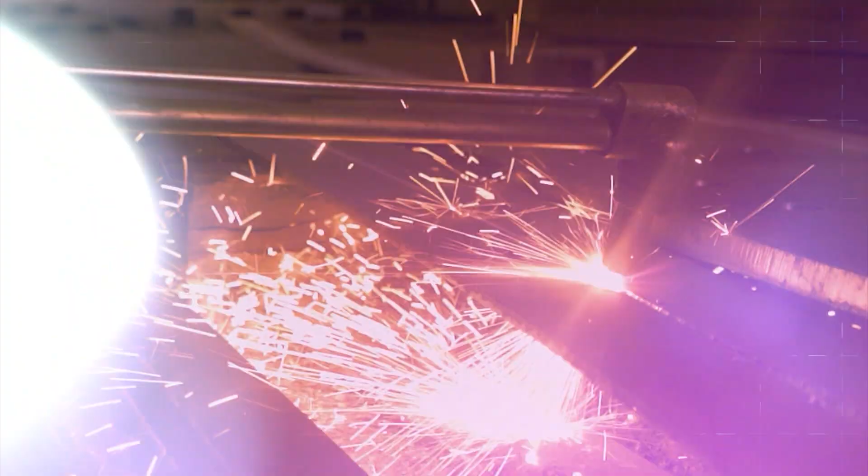Approximately 10,000 metric tons of steel, over 42,000 cubic meters of concrete, 2,300 construction professionals, 20 hours a day for 15 months, over 2 million safe person hours. Building this architectural marvel was truly a challenge.

Hockey Stadium, Rourkela, up and running. The stadium is one of the best that I've ever seen. Oh, it's one of the best stadiums I have ever played in. This is the making of the Birsa Munda Hockey Stadium in Rourkela.

Situated in the Sundargarh district of Odisha, the cradle of Indian hockey, Rourkela is an industrial town. We are celebrating 75 years of independence. It's a landmark, milestone for a democracy like India to link this World Cup with the independence movement. And Sundargarh is a tribal district where the great legend Birsa Munda had his footprints. So Honorable CM decided to name it after Birsa Munda.

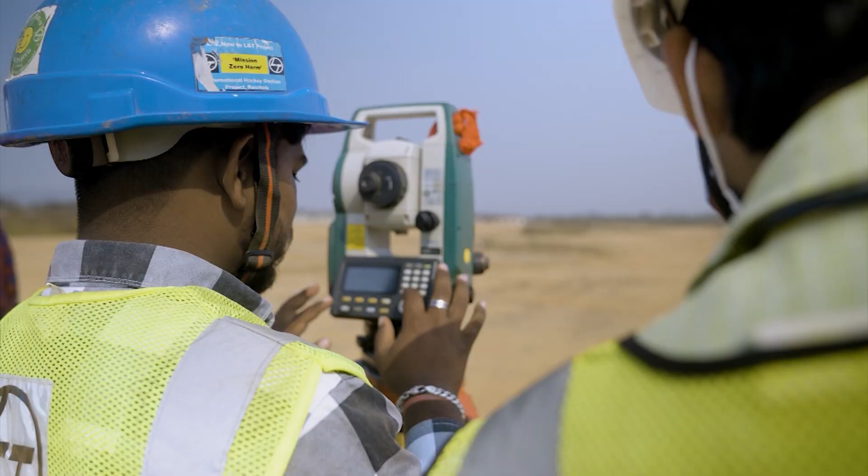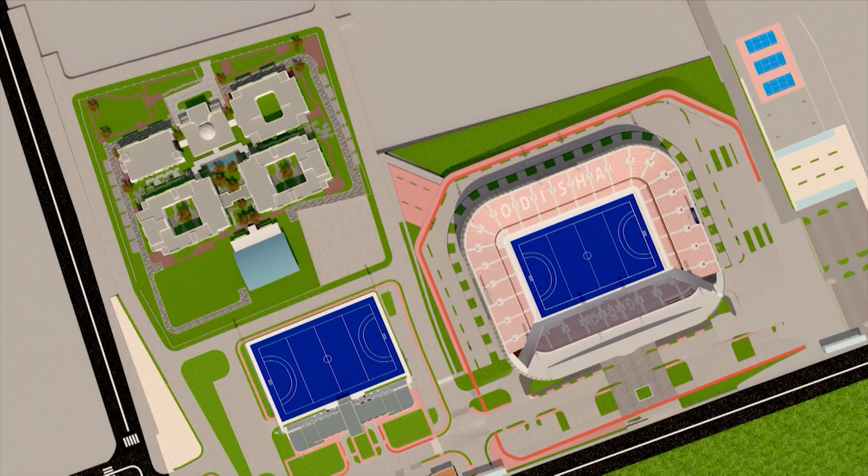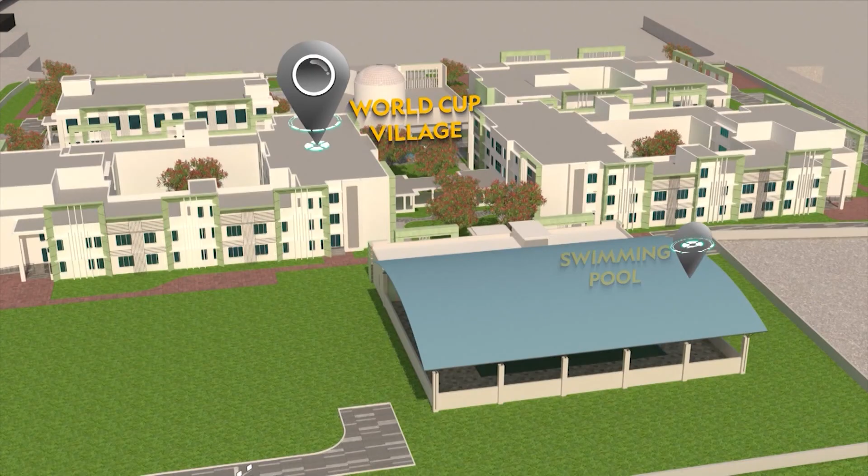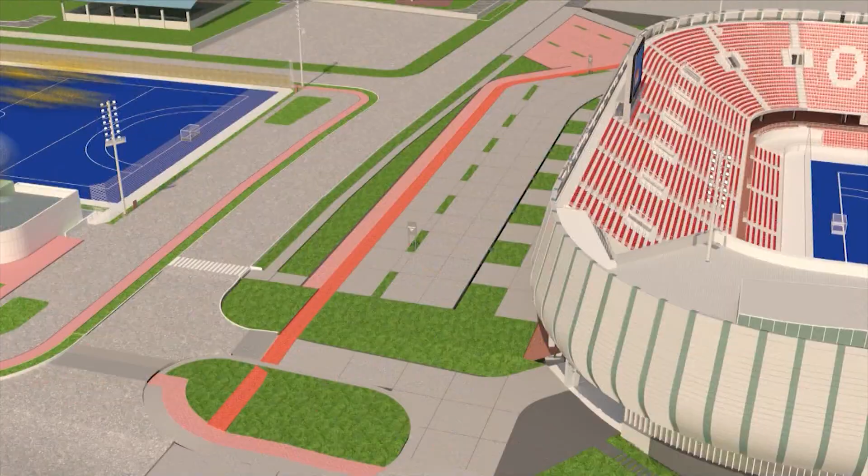The brief to the designers is that there are multiple stakeholders in organizing a World Cup, and every stakeholder should feel extremely happy about the infrastructure that is being created and should have a wonderful experience of the World Cup. This self-contained sporting complex will be spread over 47 acres. This will consist of the World Cup Village, a residential facility with a swimming pool for athletes and the officials, a practice center with the best facilities for athletes, recovery like a hydrotherapy center, sauna, steam room and gymnasium. Then the jewel of the sporting complex, the main stadium, will be built.

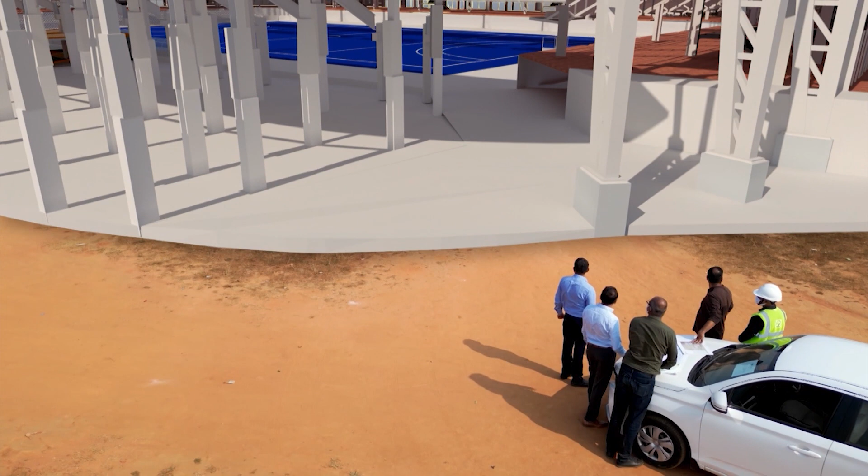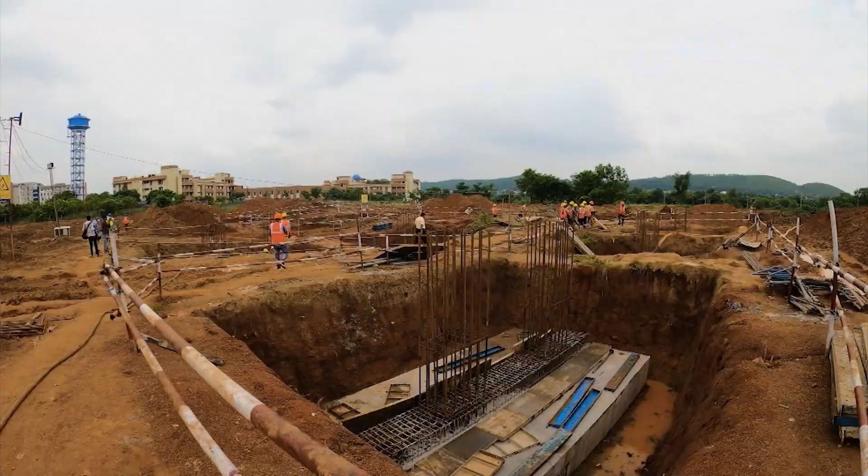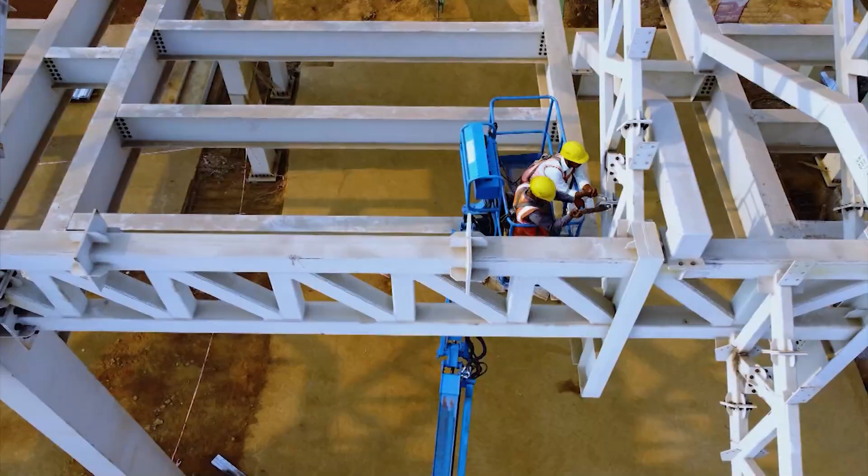Bhupinder Singh Punia is spearheading the on-site teams of dedicated professionals. We are starting to build one of the largest hockey stadiums, Birsa Munda Hockey Stadium, Rourkela. The deadline has been set for September 2022. The construction starts according to plan, with designs and ideas integrating and disintegrating before finally falling into place. The buzzing of the construction work soon gains momentum. With work gradually picking up pace, the completion of the practice pitch was the first of many landmarks to be achieved.

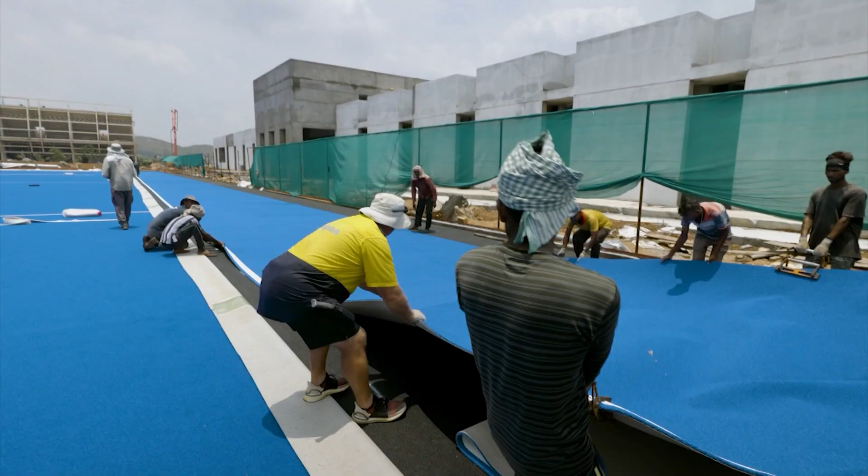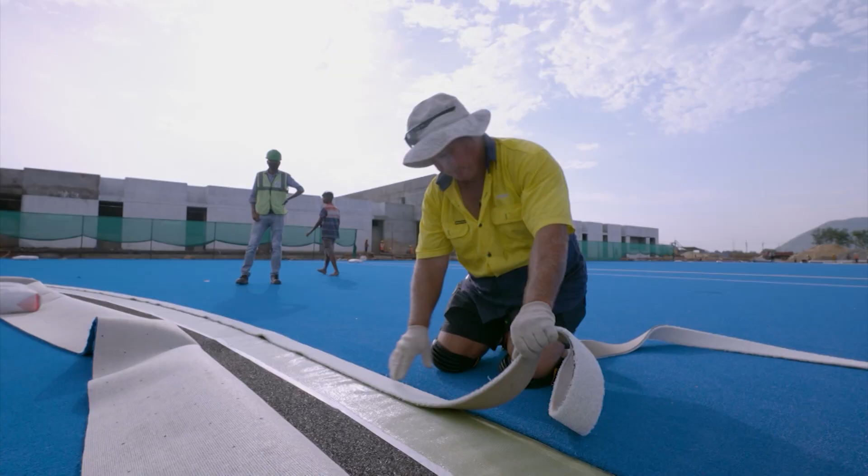Sean Goody is credited with laying the pitches for some of the top stadiums in the world. He is hard at work to ensure the handover happens in accordance with the deadlines. Our job here in Rourkela is to deliver the two men's World Cup hockey pitches for next year, 2023, part of which will be played here in Rourkela and the other part in Bhubaneswar.

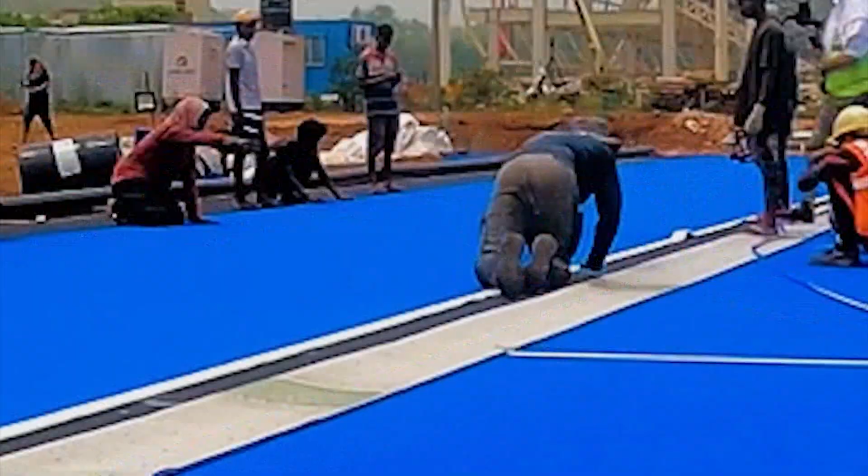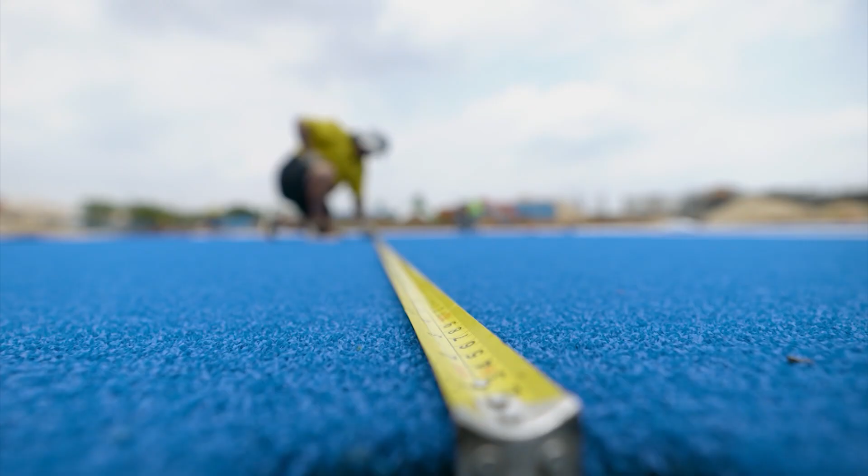With a tropical wet-dry climate, Rourkela has temperatures rising more than 40 degrees Celsius during summers. This makes it difficult to work under the scorching sun. The main challenge right at the moment is the heat. It's very humid, very, very hot. This is the last one of the 21 dashes that we have to cut for the offside penalty markings.

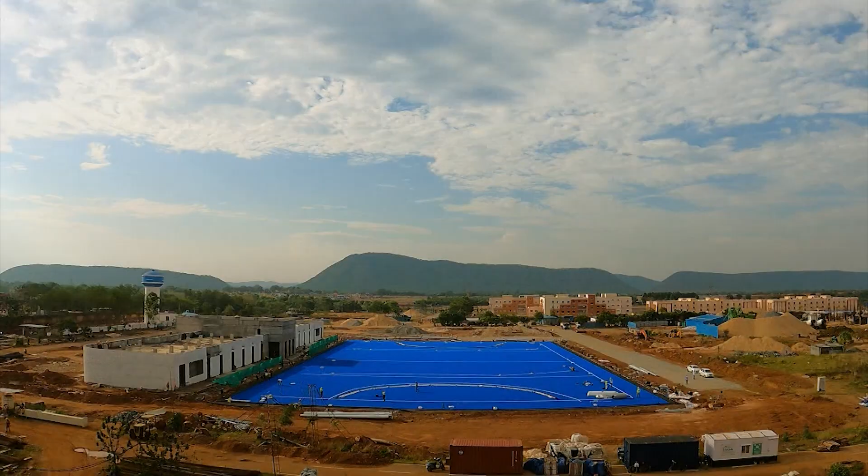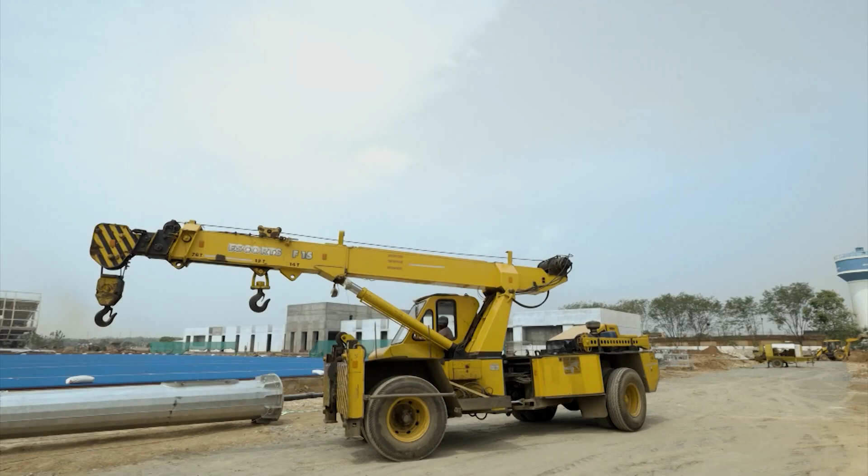Finally, the practice pitch is complete. Now is the time to celebrate. But the team is aware of the challenges ahead. We have one more pitch left to complete, and that's in the main stadium. Unfortunately, due to the shipping, that pitch is going to be delivered late. A large infrastructure project like this, lengthy delays for raw materials, supply chains, but we're confident we'll deliver these turfs ready for the World Cup next year. After the completion of the practice pitch, another important landmark is the elevation of the high mast.

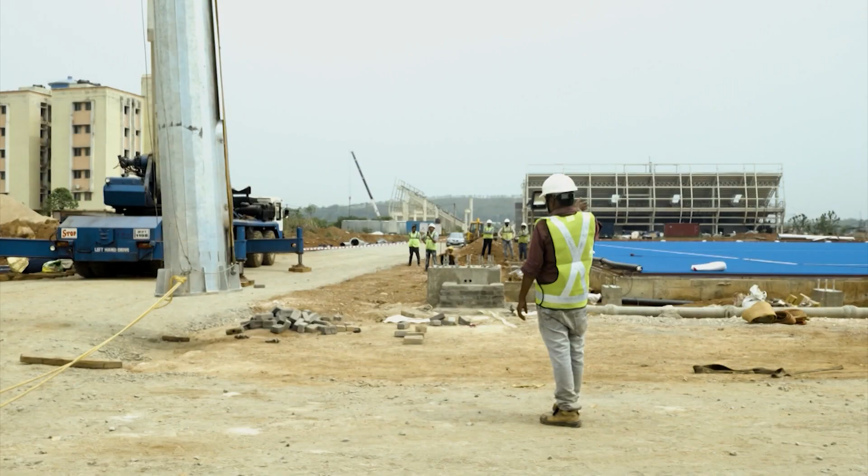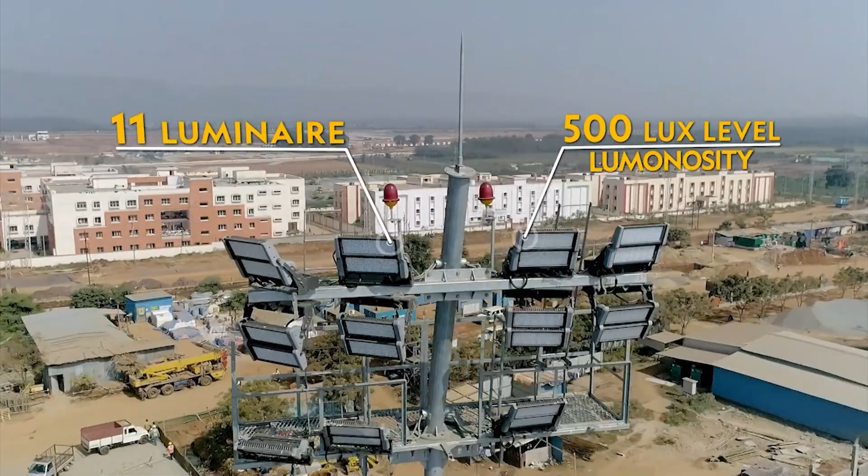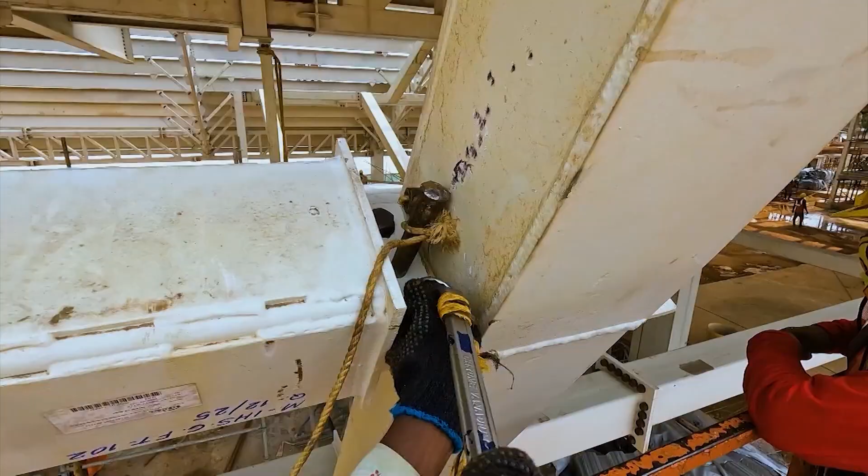Now with the practice pitch done, all the attention shifts to the main stadium. With only 3 months to the deadline, the work is far from finished. The designers chose prefabricated structural steel columns over conventional RCC, keeping in mind the topography of the site and to compensate for the lost time due to design amendments.

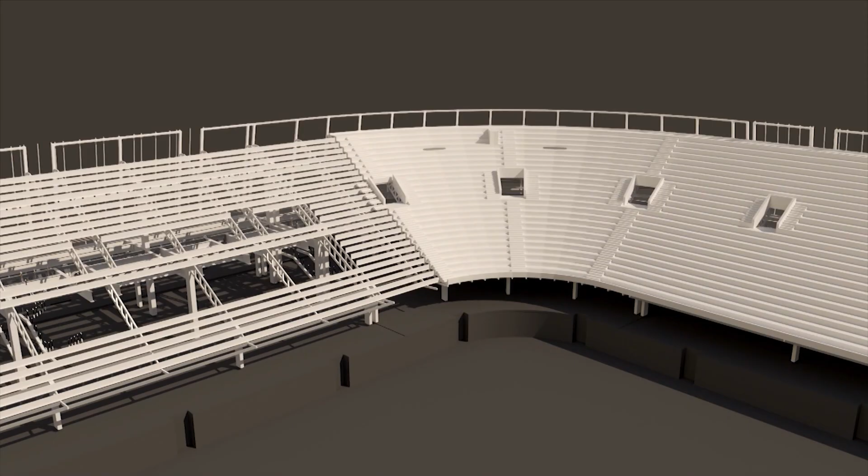The flexibility and reduced construction time has made prefabricated structural steel one of the most preferred materials for stadium construction. Unlike conventional RCC, steel can be designed and fabricated off-site, limiting its exposure to adverse weather conditions.

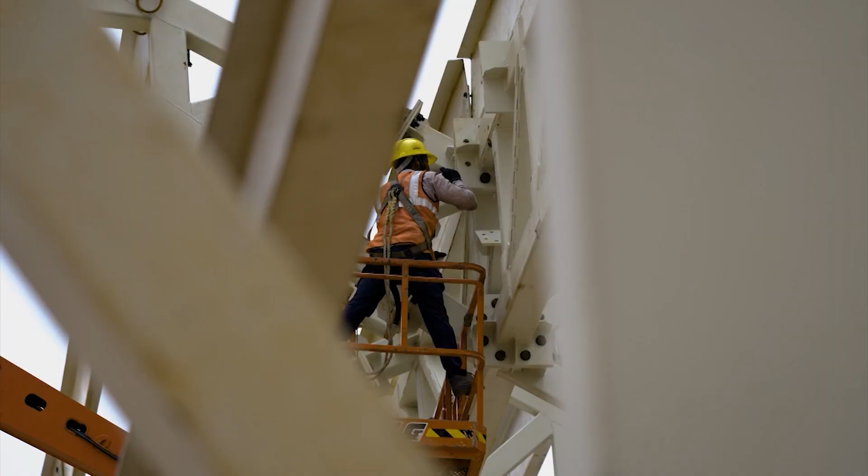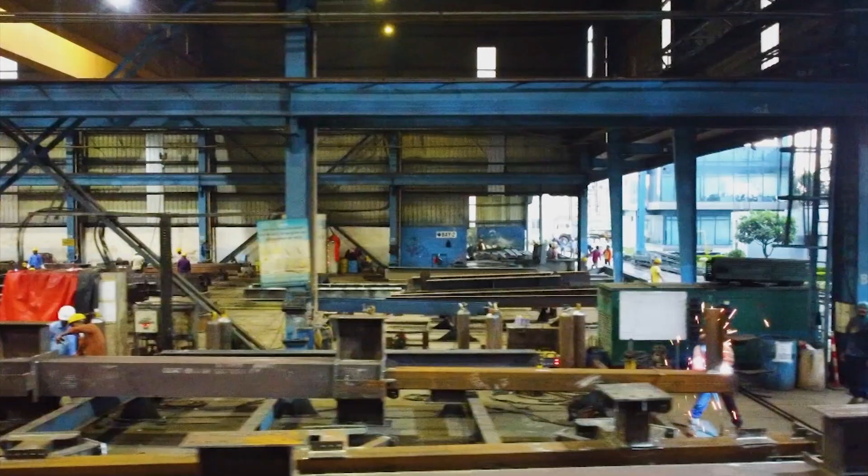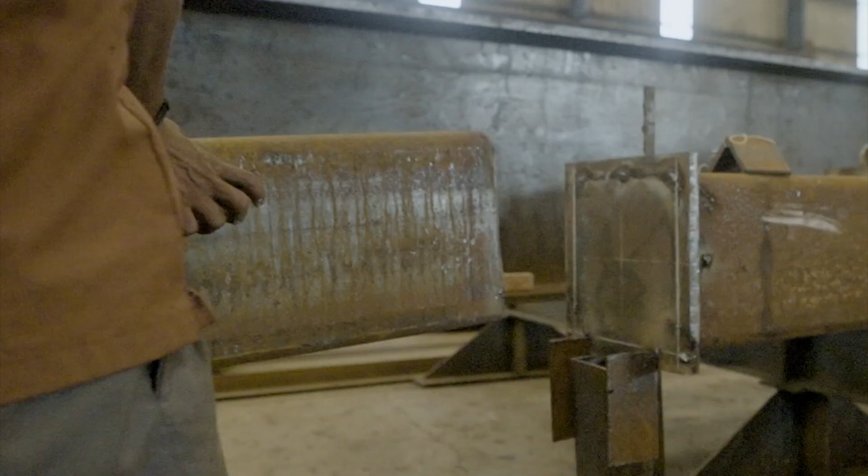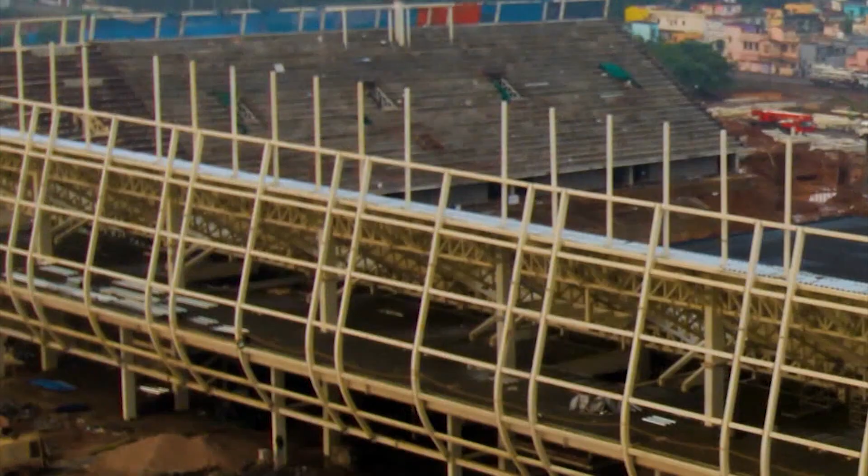This fabrication unit accurately puts raw materials into a machine, which then cuts the steel plates into various components. They are then welded together to produce ready-to-use steel structures for stadium construction. These steel structures not only form the foundation for the entire stadium, but will eventually give the stadium its look and feel. A stadium of this magnitude requires a whopping 3,600 metric tons of structural steel to ensure stability. Transportation of those quantities of steel is not an easy task.

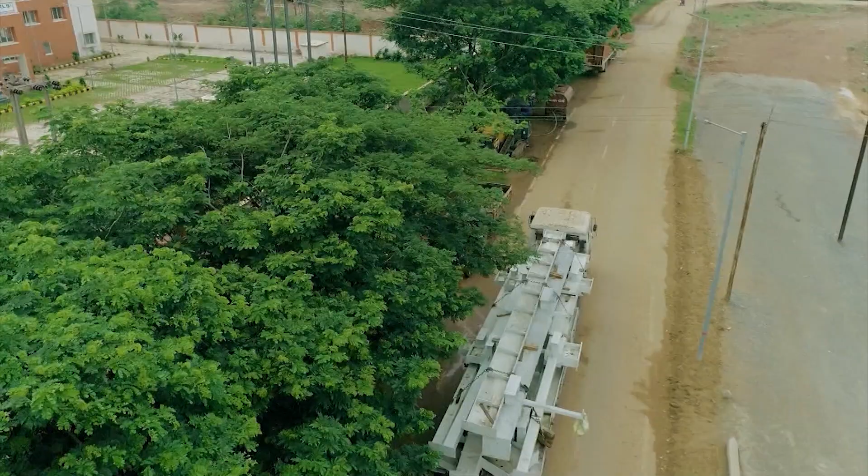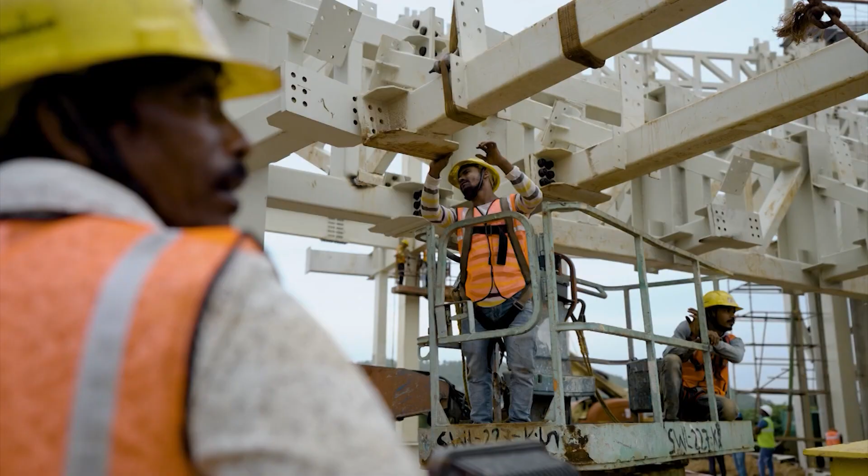After due diligence, the prefabricated columns are unloaded to be used in the construction of the stands. The overall management was done by the sports department. Mr. Vinil Krishna is the secretary, and the Honorable Minister, Mr. Tusharkanti Behra. Both of them played a major role in planning, execution, day-to-day monitoring and everything.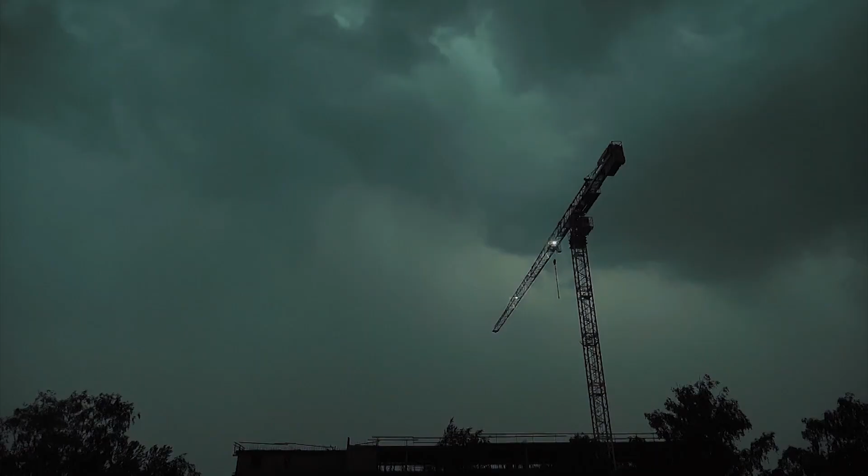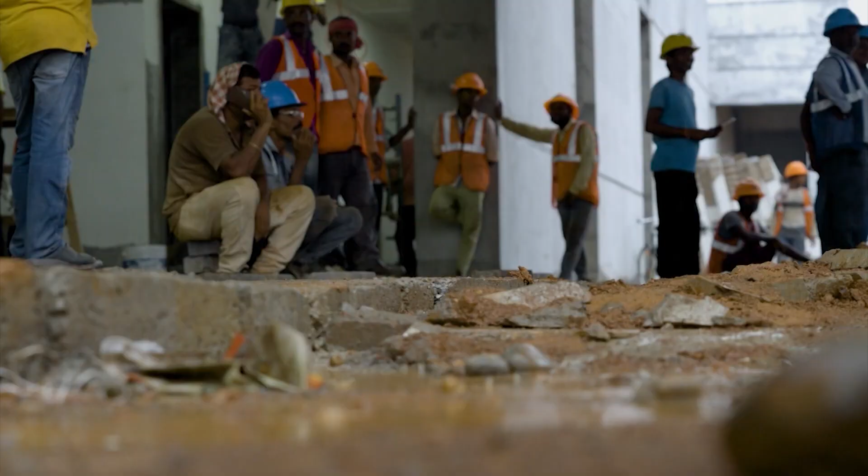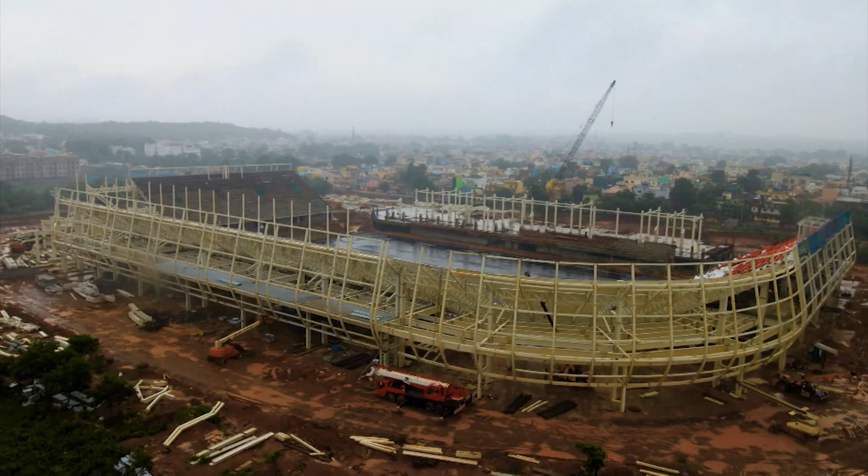With the onset of monsoon, the deadline starts shrinking again. The rain in these parts of the country can last for days. It's the monsoon season now, so we need to plan around that. We need to be able to work within that. I'm confident our crews can do that to deliver these pitches on time. This year also we had an extended monsoon. So for considerable time, outdoor work was completely stopped.

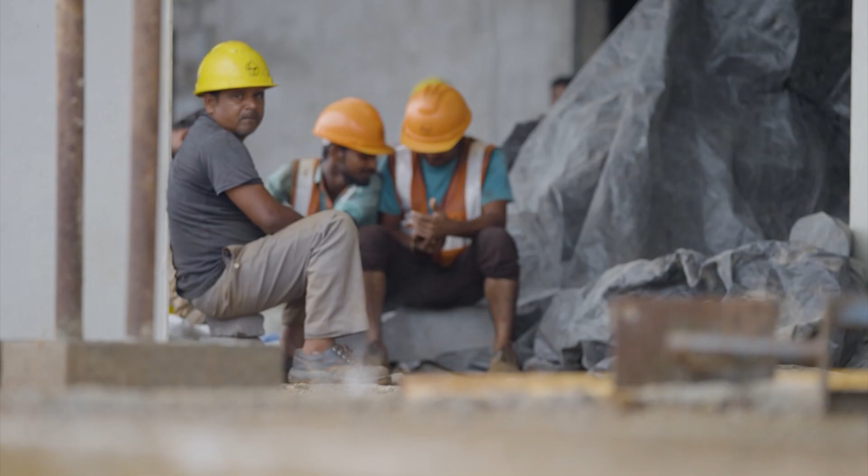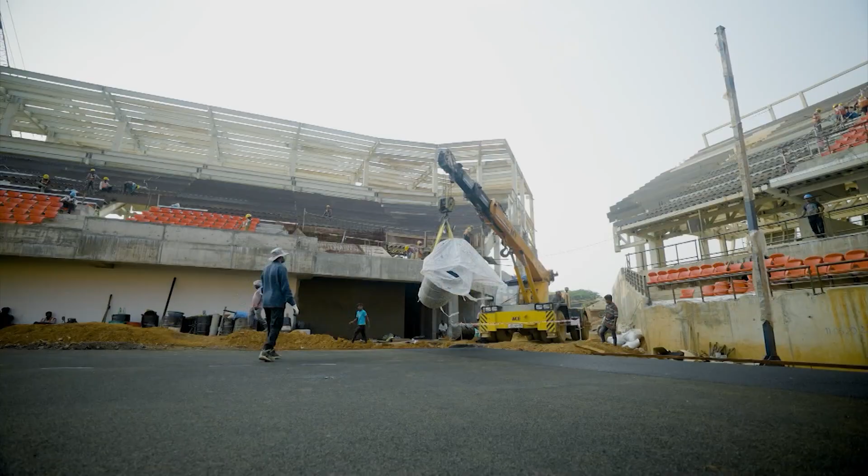The non-stop rainfall has put various teams under tremendous pressure. The stakes are now higher than ever, with the deadlines looming large. Delayed due to the rains, the turf for the main pitch has finally arrived from Germany. Without wasting any further time, the team gets down to laying it.

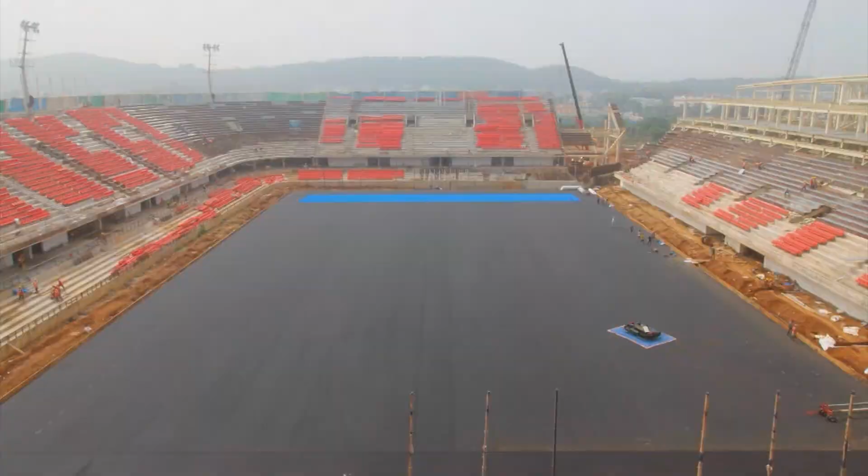With the advancement of technology, the game has moved from natural grass to artificial synthetic turfs. Manufactured by Polytan, the pitch consists of a synthetic surface made 60% from sugarcane waste turned into polyethylene. This is a polymer base for the synthetic turf. Under this top layer is an elastic layer or shock pad layer of recycled granulated chips of car or truck tires bound together by polyurethane binder. This is made of the CO2 gases from industrial sources, which are then turned into polymer-based binders. At the bottom are the two layers of bitumen macadam to achieve a very high level of flatness.

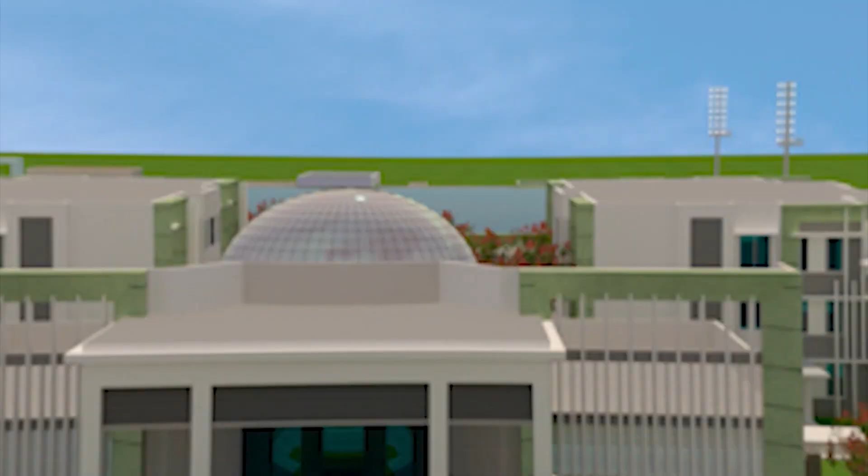While the stadium construction is in full swing against all odds, the construction of the proposed World Cup village is slowly but steadily progressing. The World Cup village was required because the accommodation space for the teams to be hosted in Rourkela was quite a concern because of the limited number of hotels that are available in the city. So therefore the government had decided that we should construct a new facility like an Olympic village, a World Cup village.

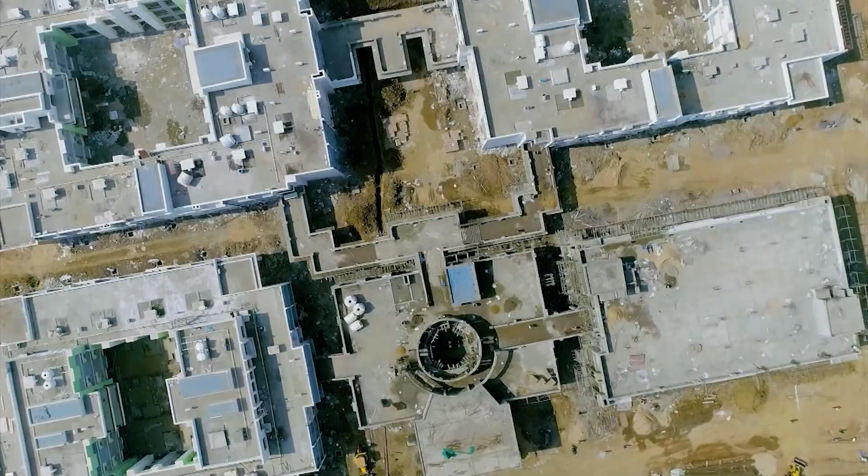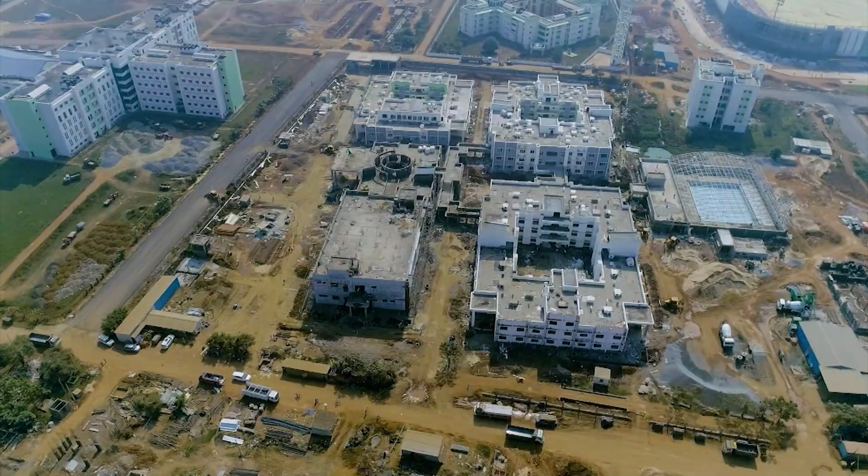Designed over 160,000 square feet, the World Cup village will have 5 different blocks, out of which 3 blocks will have 225 rooms, with 1 block for the kitchen and gymnasium. The last block with the reception and other recreational facilities are taking shape in a record time of 9 months.

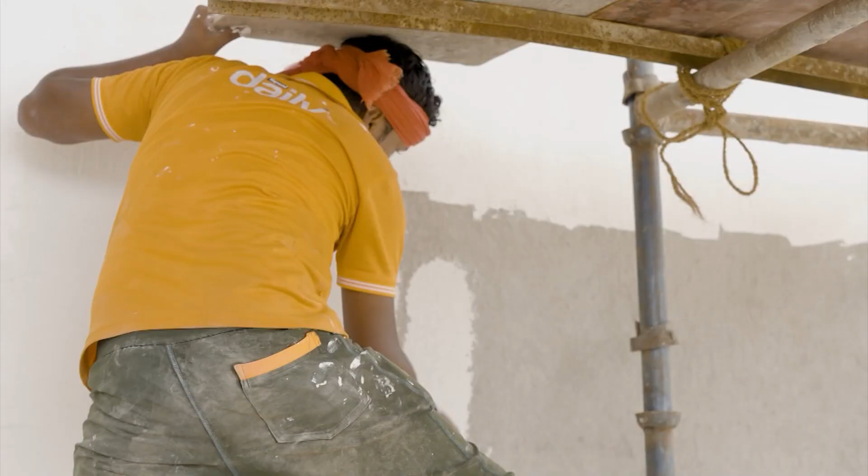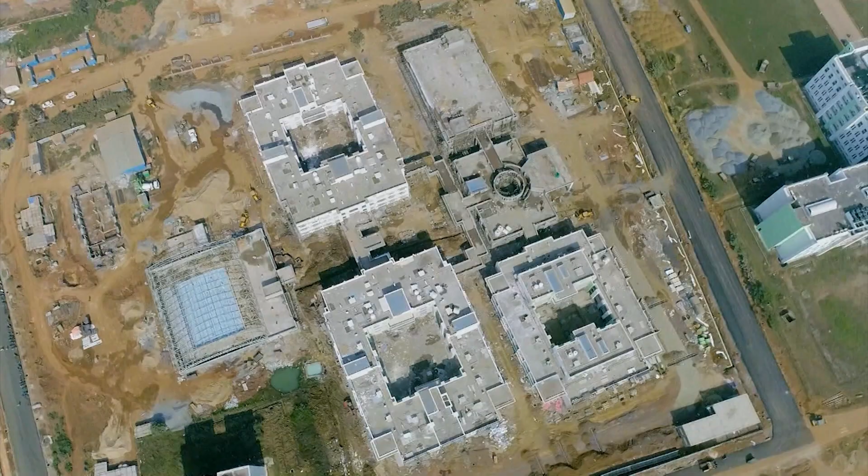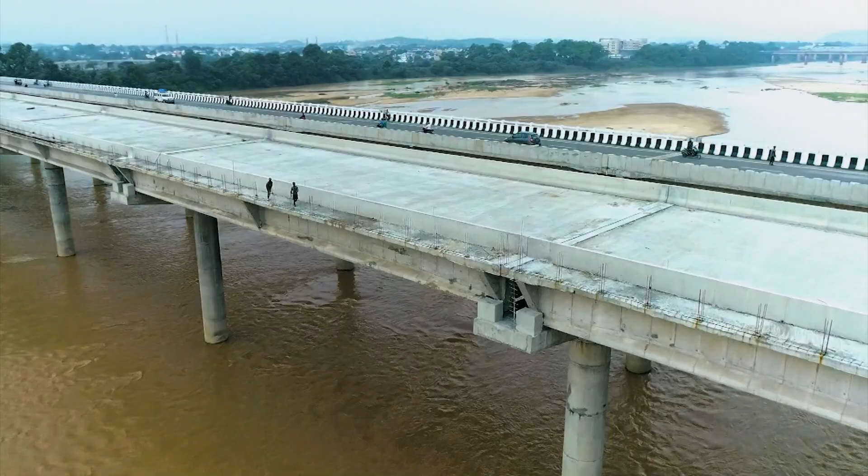In preparation to host, the city of Rourkela is undergoing a major revamp with various beautification and infrastructure projects underway. One such project is the expansion of the Rourkela airport. The team is carrying out a runway friction test to ensure that the Rourkela airstrip is upgraded for better connectivity in time for the World Cup.

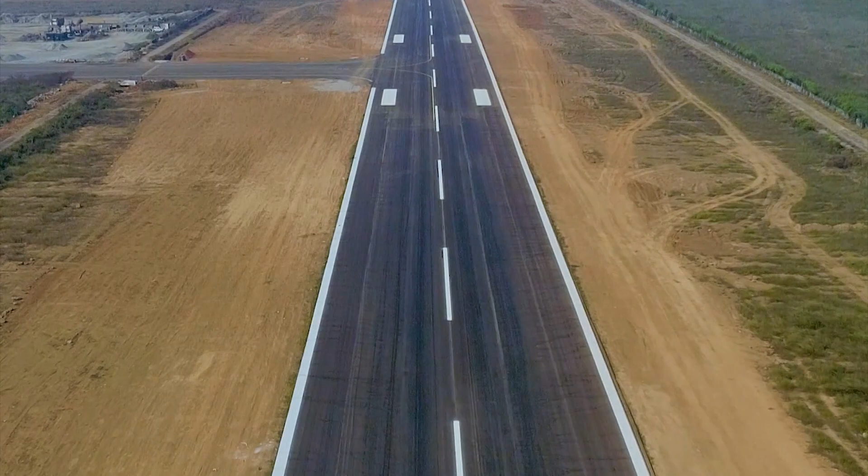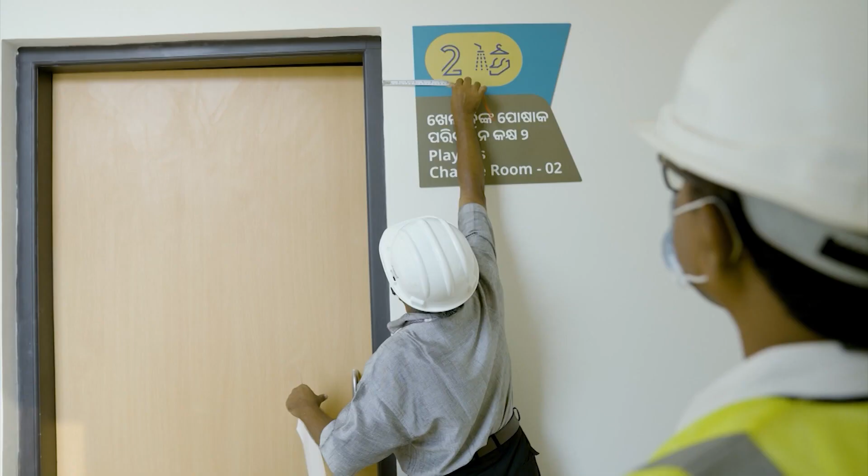It is one day before the deadline. The construction should have been over by now. The members of the organizing committee, the International Hockey Federation and Hockey India will arrive tomorrow to inaugurate the practice center and take stock of the remaining construction work. All the teams are working hard and putting their best foot forward. After all, months of planning and hard work will be put to a final test now.

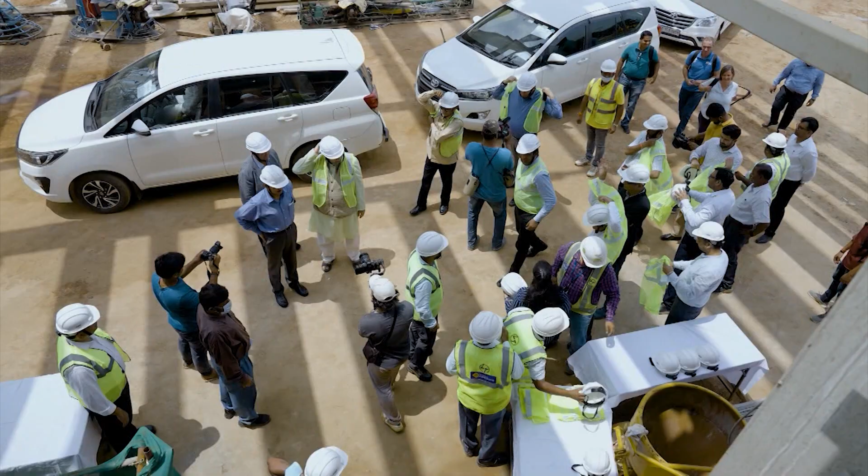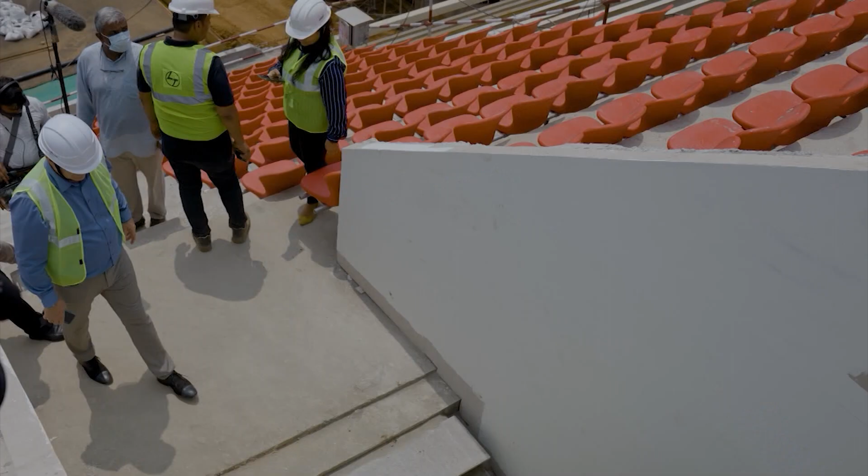After the inauguration, the team visits the main stadium to inspect the progress. When you're going into the stadium itself, then you get actually the size of the venue, that you understand that the drawing was really reflecting the reality. It's not finished yet, but the way they work, the way they accomplish, the number of people on site, I have no doubt that this will be finished in time. The timeline has now been extended by 3 months.

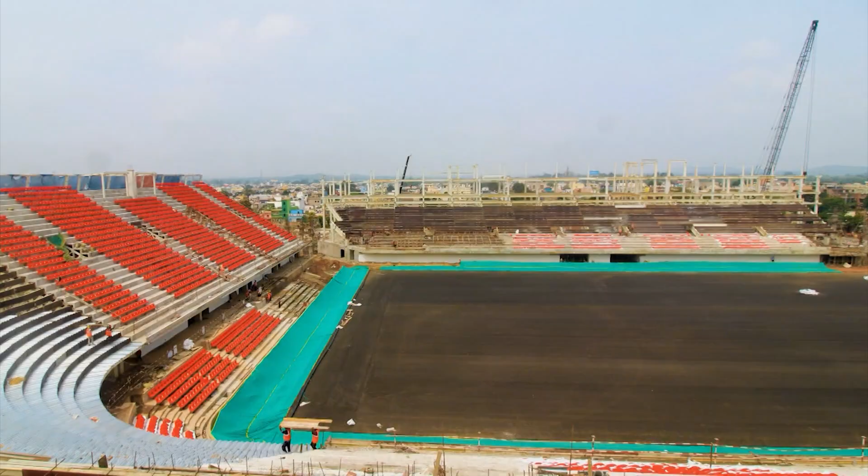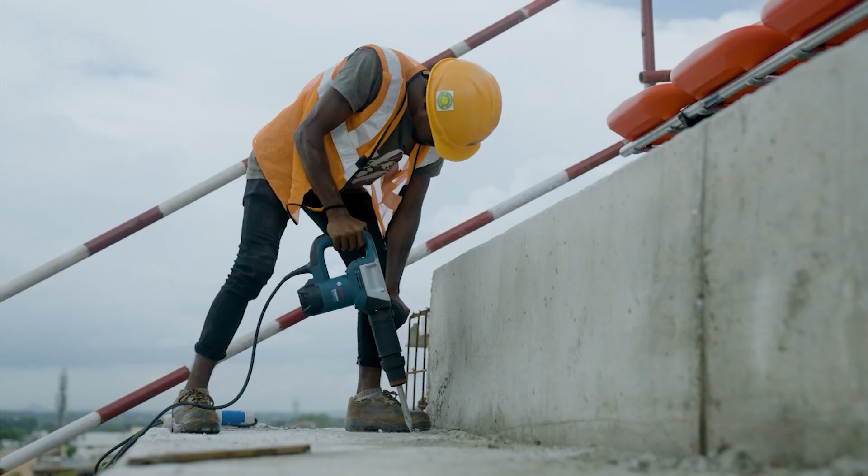Once the construction is over at the stands, it is time to install the seats. A spectator will be in a seat for a long duration. Hence, the seats must be ergonomically designed and in such a manner that each spectator gets an unobstructed view.

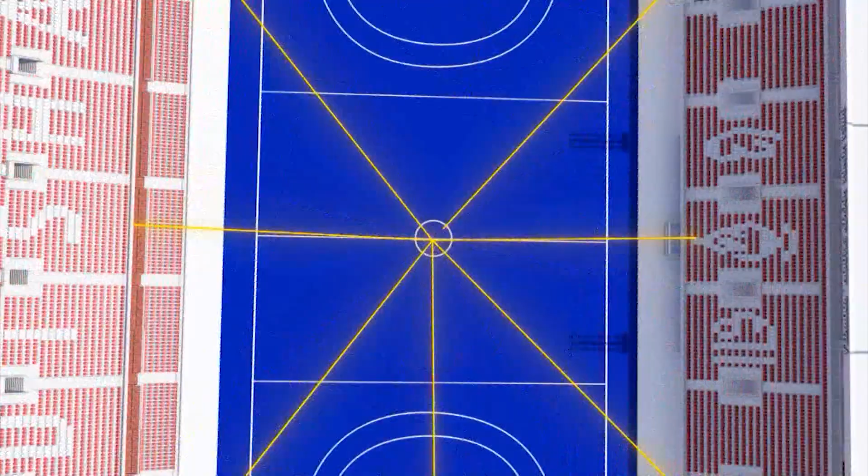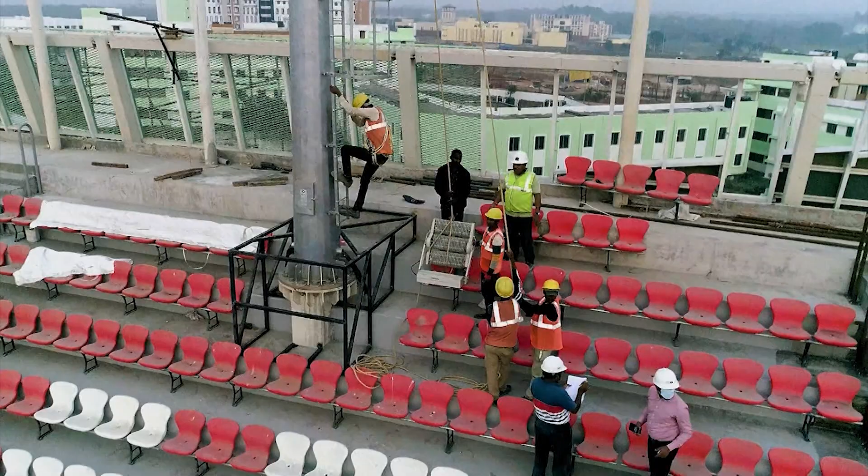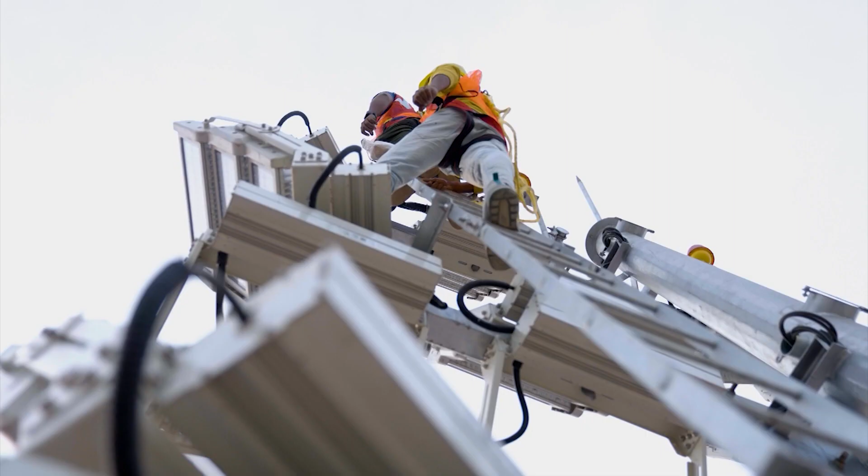The lighting system of the main stadium is one of its kind in India, and it has 8 high masts installed in such a manner that there will be fewer hotspots around the field of play with equal luminosity levels. The light system has to meet the technical requirements of not only FIH but of the modern day cameras for television broadcast.

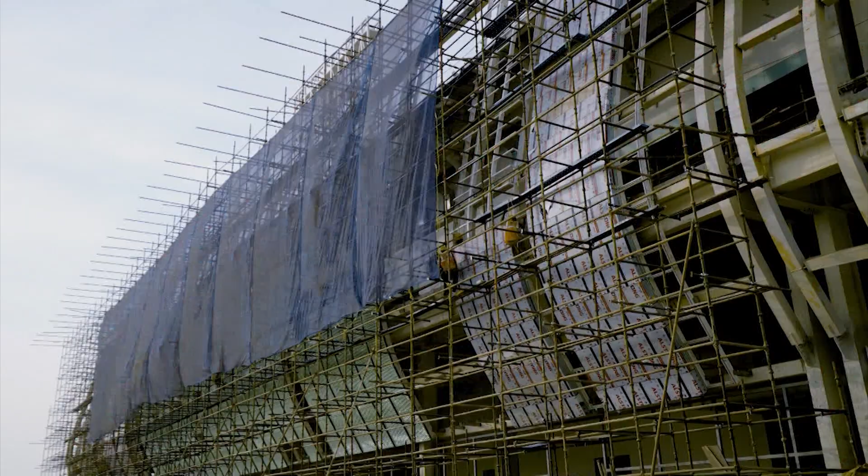With a new timeline in place, work on 3 stands, north, east and south, is nearly complete. The work on the facade, the stadium's outer layer, begins. It is a jewel in our crown, and therefore it should look like a jewel.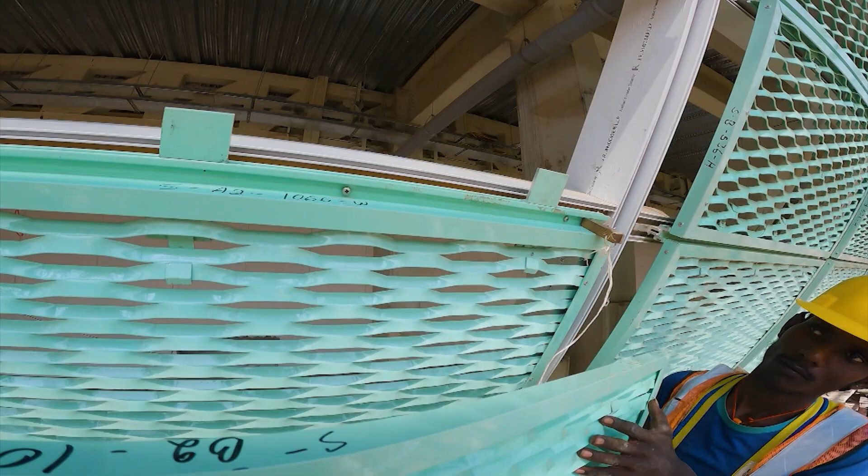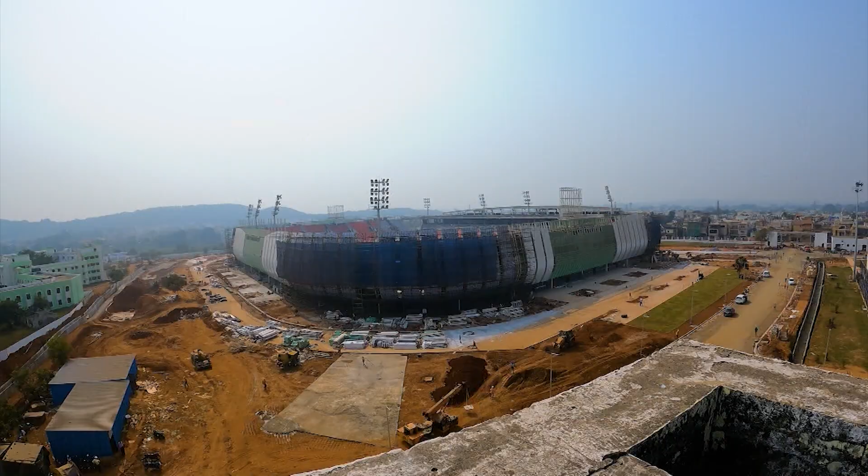Honorable CM is very fond of having the best of architecture. He wants the best to happen in the state. From designing the color of the facade to almost every architectural design, he had a look at it, and he allowed the teams to come with nice creative ideas. As the facade takes shape, the team is preparing to focus solely on the west stand.

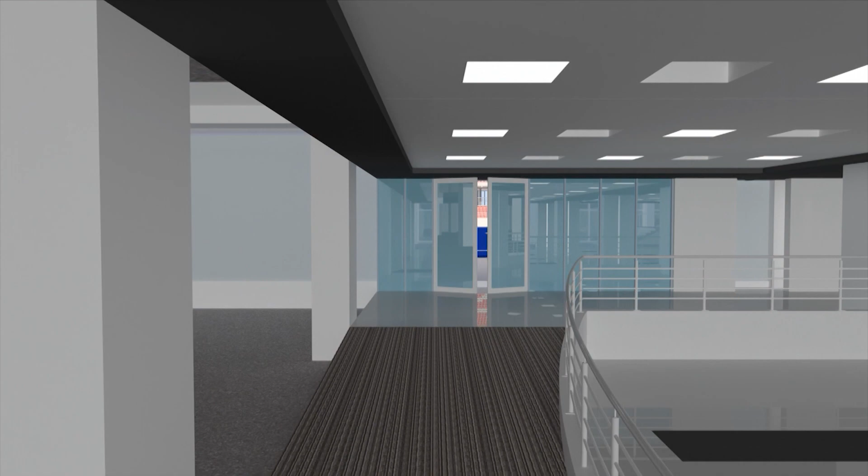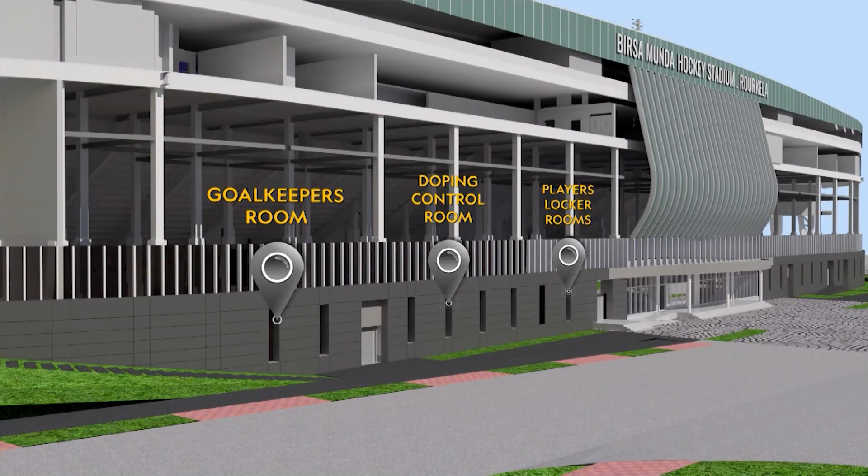The west stand is the main stand. At the ground level, it is the entry for all the players to the field of play. Additionally, there are technical and official rooms for Hockey India and FIH, along with broadcast and press conference rooms. On the upper ground floor is a stand with premium priced seating along with various facilities. On the first floor is a stand for the dignitaries, replete with lounges and a media center.

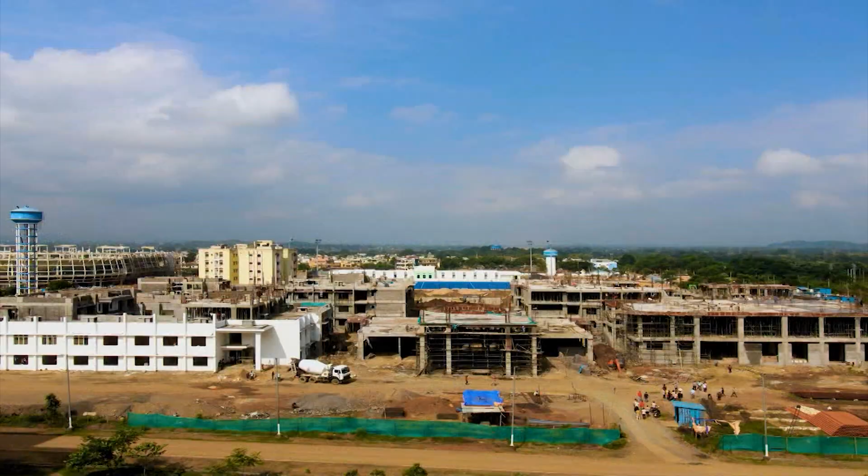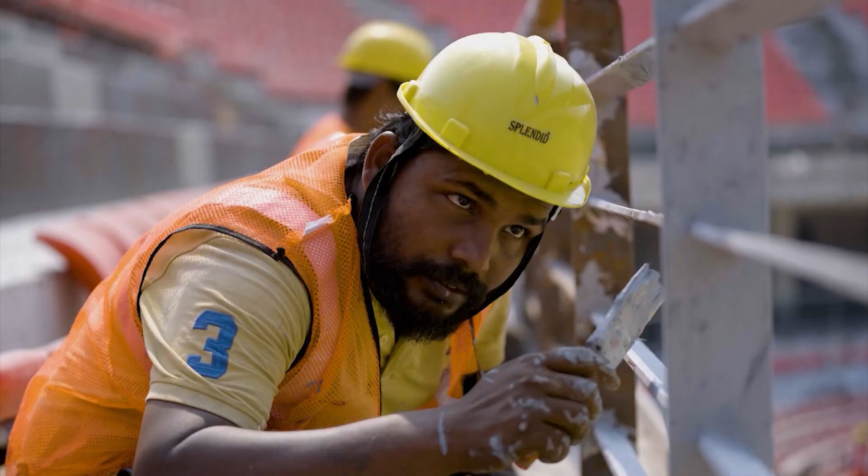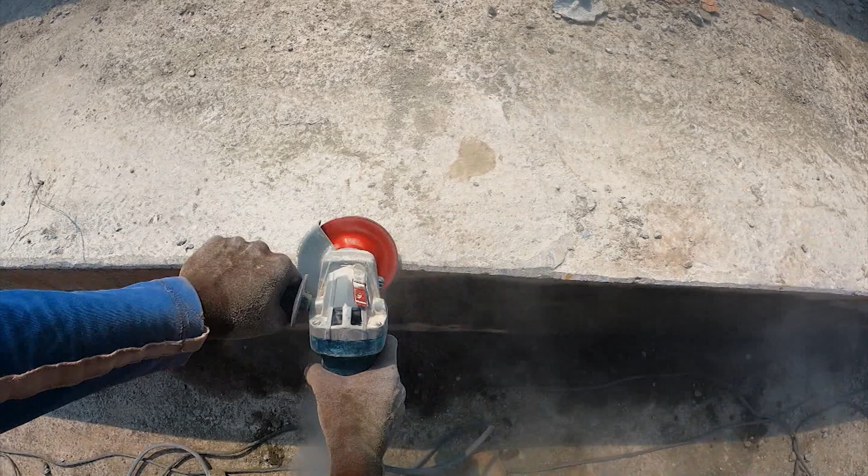With work on the World Cup village in its last leg, meeting the final deadline now finally seems possible. Now the deadline is fixed, non-negotiable. Work on all stands is almost complete. Now we are ensuring that all equipment facilities are up and running. We hope that we will deliver it well before the time. With the construction over, now all the teams are giving finishing touches, be it the lights or the facade.

To take stock of things, high-level officials arrive to inspect the progress. With most of the facilities up and running and being tested at the World Cup village, a high-level meeting takes place in Bhubaneswar to take account of the coming World Cup. Back in Rourkela, the teams have started arriving and acclimatizing to the venue and the facilities. Built during extraordinarily challenging times, truly highlighting the team's grit and determination, the project deserves a quick retrospect.

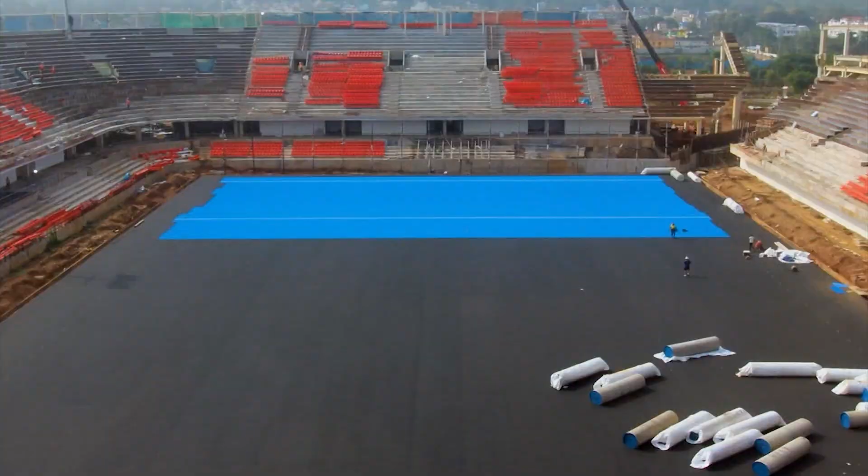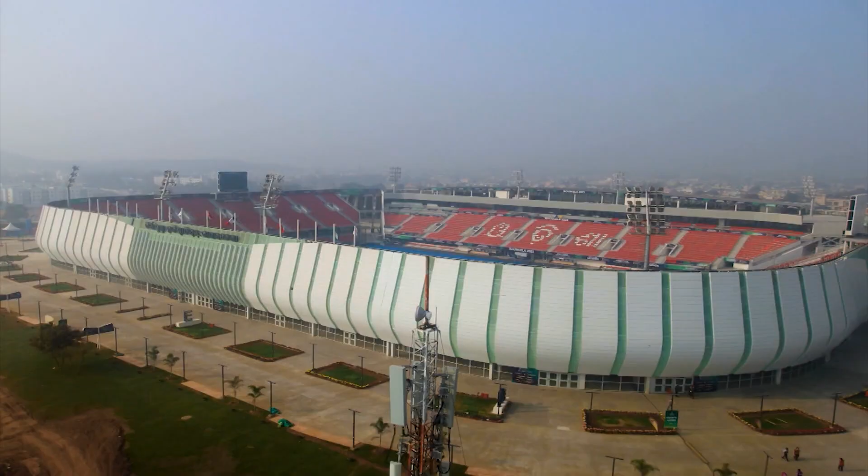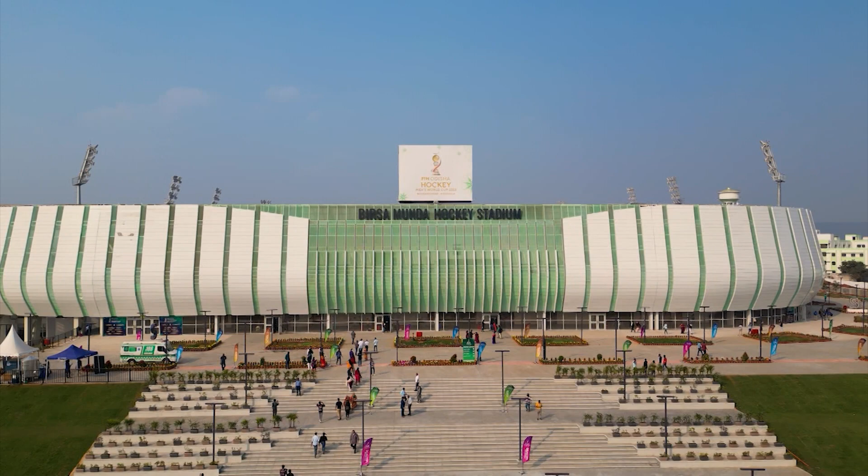The stadium is not just a hockey stadium for us, it's a landmark for Rourkela. And therefore it is developed in such a manner that it can be used like a public plaza, and it will be open to the public for most part of the year. It will continue to be a very active and vibrant location for the citizens of Rourkela.

We were not having a stadium, there was no airport, and there was no players' village. We took all the risk of creating a stadium in 15 months, putting up a World Cup village, and with all the support from Government of India, we got the airport also done. This stadium has been completely differently abled friendly. We have one of the largest stadiums in the world. The idea behind this, to honor the passion of hockey loving people of Sundargarh.